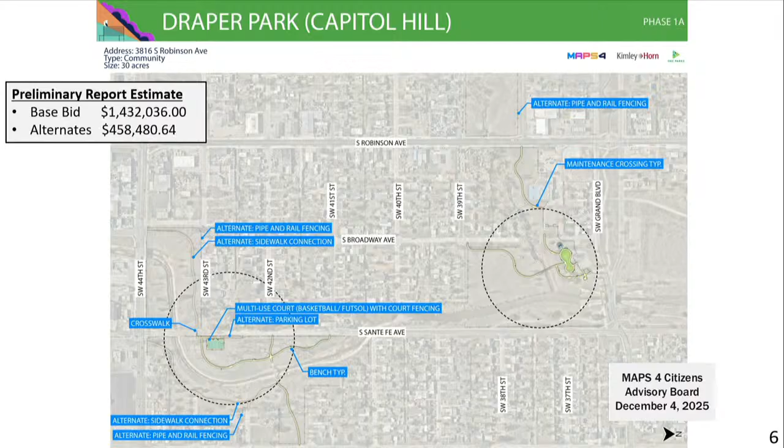We'll quickly go through the highlights of the 20 different park improvements. Capitol Hill, or Draper Park, is a long linear park where we really focused on connecting neighborhoods on each side of the park, so a lot of the improvements are those connections, plus a maintenance crossing through the park. Here's an enlargement of one end that includes a multi-purpose futsal and basketball court, and connection to the existing bridge to better connect those neighborhoods. The other end adds a playground, a pedestrian bridge going across, and a shade structure, with new sidewalk, playground, and a multi-use court.

H.C. Schilling is a park next to Wheeler Middle School. They've already done a futsal basketball court there at the school that's adjacent and can be accessed by the public, so we're recommending adding a playground and splash pad combination. A lot of these focuses are bringing splash pads and playgrounds together, since some of them have been separated out.

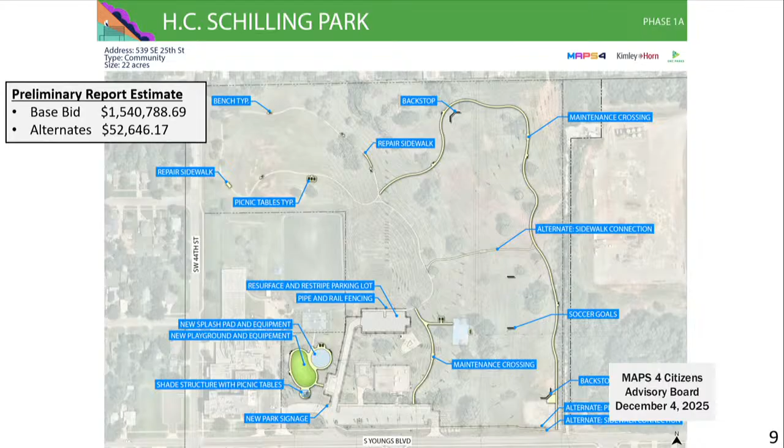So as we replace them, we bring them together into one space. We also are upgrading park signage. There's an enhanced trail loop on this one as well. They already had some trails, but we're continuing that loop around.

May Park, small, basically empty park currently, showing improvements of a playground, a new multi-use court as well. And as I mentioned, the park signage is something we really want to get into all the parks as we do this. The Parks Department has a new standard, so we want to highlight that, and hopefully that'll show the new look with all these park improvements.

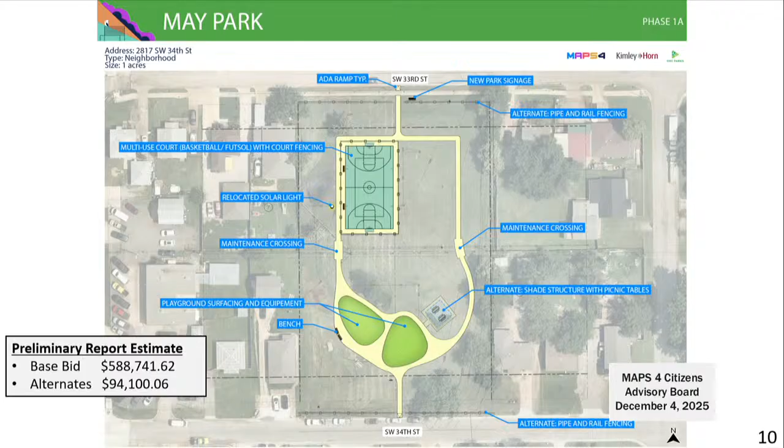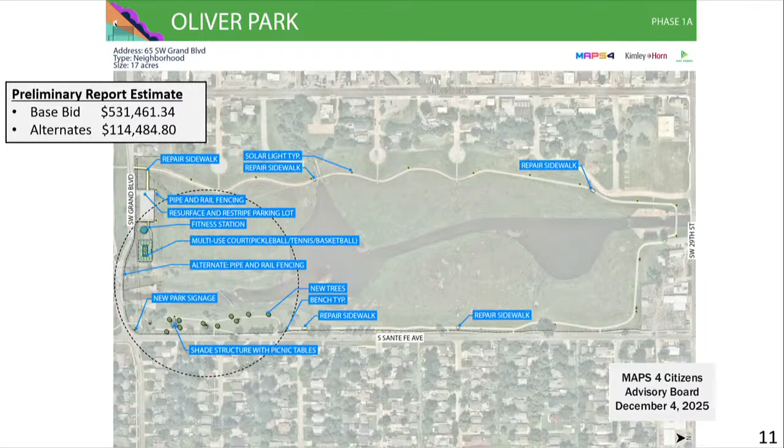Oliver Park. It looks like a large park, but it's mainly a regional detention basin, so a lot of the improvements are on the outside. We looked at the south end to improve the parking lot, multi-use court, some new park signage, and then lighting was a big piece along the loop of this trail. We didn't have a playground on this one because Draper Park is right next door and it has the playground. So we looked at improvements across the system to make sure we weren't duplicating.

And here's the end with the multi-use court, and we're also including a fitness station on this one because of that walking trail that goes around the park.

Shallowbrook Park is a larger neighborhood park that's getting a new playground. We also looked at goals and backstop locations, and you can see there's some dashed lines out there that show where the practice fields could be. So we wanted to make sure our improvements weren't taking space for those practice spaces. We looked at that and really worked closely with parks. Also, this has an alternate of a no-mow area. It's a large park where they just mow it right now, and we're trying to reduce some maintenance. So if we can get enough funds, we can do the no-mow area.

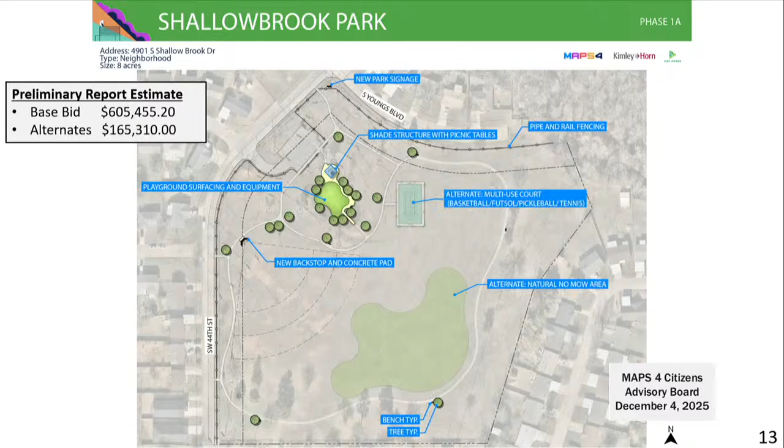Youngs Park includes replacing a playground and splash pad. It's actually a neighborhood park, and the recommendation isn't to have splash pads in neighborhood parks per the Oklahoma City standards, but it already had one. So we're replacing it, but it'll be a small version of a splash pad versus some of the larger community parks that'll get a larger splash pad.

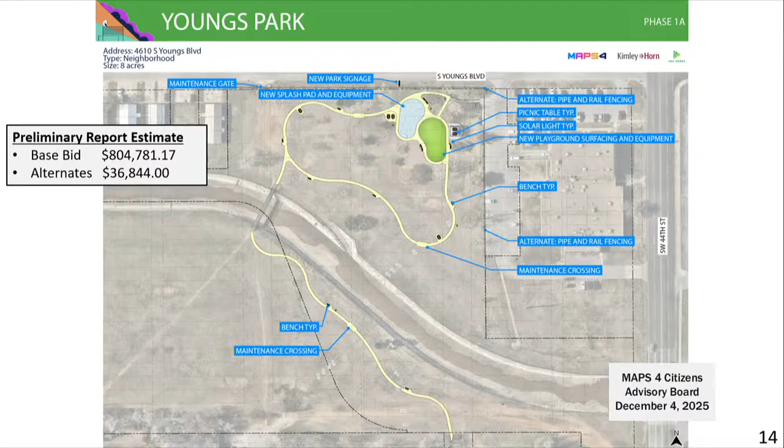And then the last one in 1A is Zurline, which is a long linear park. This is just one section of it, but it does include playground, multi-use court, and a pedestrian bridge. Currently there's a utility bridge with a pipe that people have used to go across, so this will definitely enhance that connection with the new pedestrian bridge across the creek.

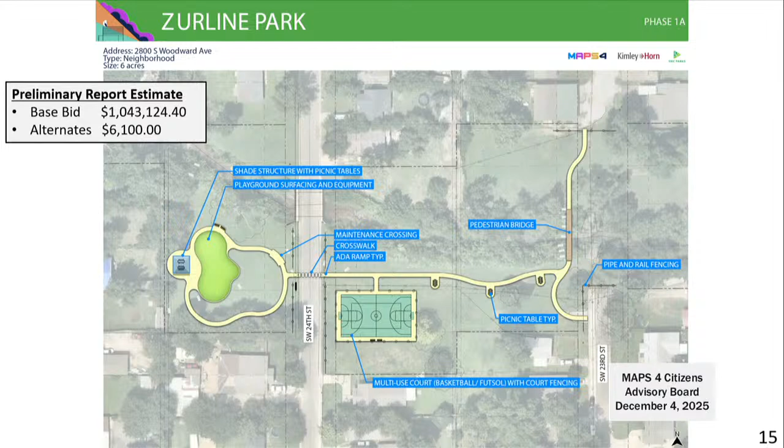And then 1B, I should have mentioned earlier, on 1A we try to geographically locate these parks so they're together for contractors to work in a more geographic region. So it was the parks with the most need, geographically located. 1B is a little more spread out, mainly because of the bond projects. So Macklanburg is on the north end of town, that's because it has bond money. So that's why you'll see that one a little outside the geographic area. But for the most part, the core parks are all consolidated together.

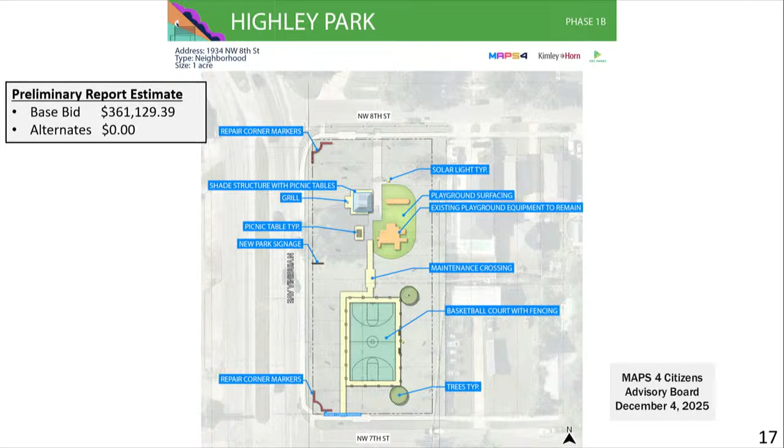So 1B has a budget of nearly 8.9 million, and that, like I said, does include the bond money. Highley Park in 1B is a small neighborhood park, currently has a playground, doing some surfacing upgrades, and then also a basketball court, and upgrading some historical markers on the ends that needed some repair as well.

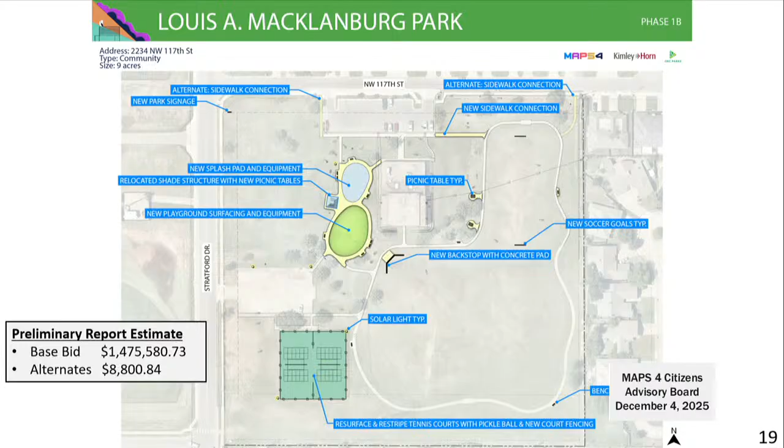Macklanburg is an active community center within the park, so really looking at how we can activate it together. So this one did have a playground, a splash pad on each side of the community center, bringing those together to create a larger play space. It also includes a focus on inclusive play, so the budget's a little bigger on the playground to really provide an enhanced inclusive play opportunity there. All of the playgrounds will have inclusive play, but this one's a little more enhanced. It'll also include striping and resurfacing of the existing tennis courts there, so there's 2 tennis courts at the park already.

Mark Twain, small neighborhood park, already has a playground that's in good condition and has some surfacing already in place. So adding some new surfacing and then a new shelter. Minimal improvements, but it already has most of the elements that it needs.

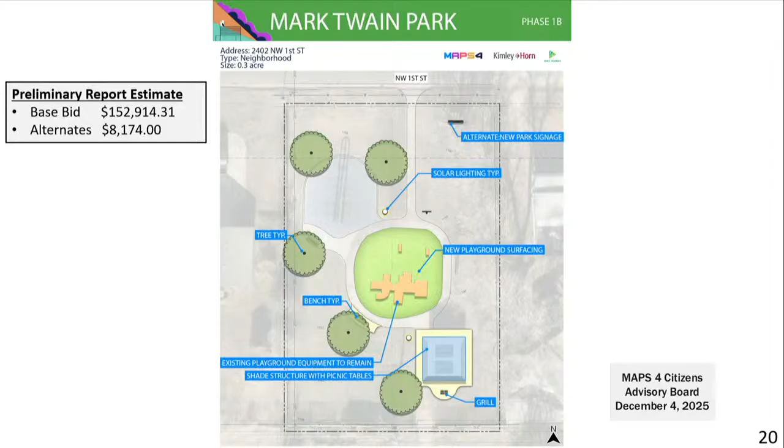McNabb Park is a long linear ribbon, really pretty area. It has some drainage that goes through it, so we're working through that. We also wanted to utilize smaller play areas because of its shape, instead of one large area, using 2 or 3 smaller spaces for some smaller kid play. Also looking at some protective decorative fence to keep kids from going out to the street on 33rd Street.

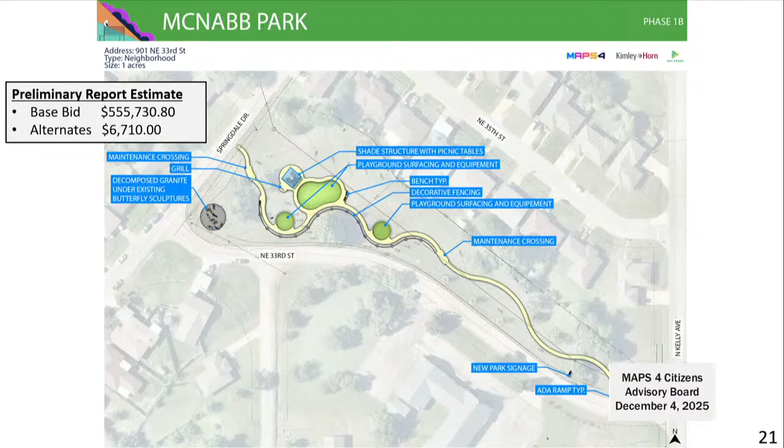And we're getting close. There's a lot of them.

Riley Leroy Pitts Park, again another community center park, active. We actually held one of our community outreach events there. It needs an upgrade to the playground. It didn't really have any walking loops, so we're looking at a walking loop, some backstop and soccer goal areas. It's an active park for practice, and we're doing some parking lot improvements on it.

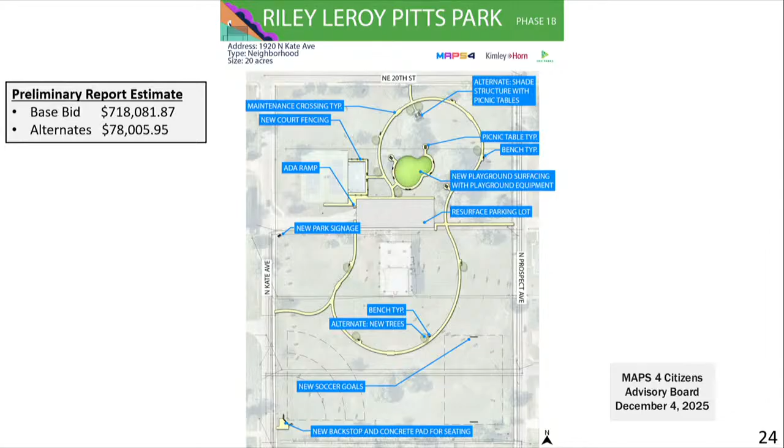Taylor Park, again kind of the same concept with the splash pad and playgrounds together, making those work better together. This one also had a basketball court within the parking lot, kind of an add-on makeshift basketball area out there, so we're removing that and creating a new basketball court, as it should be designed and built.

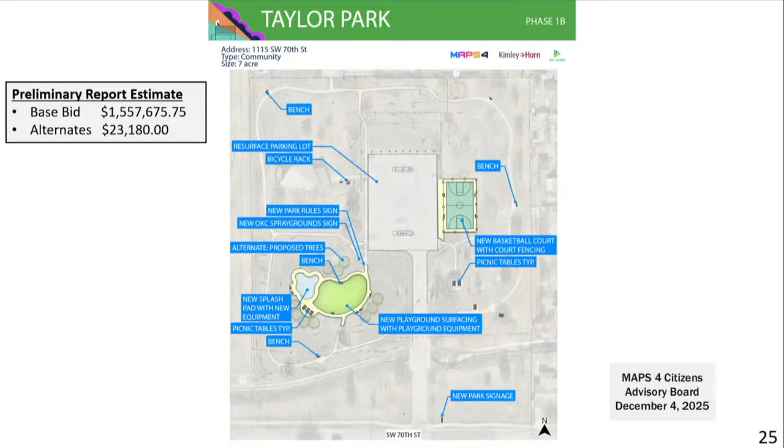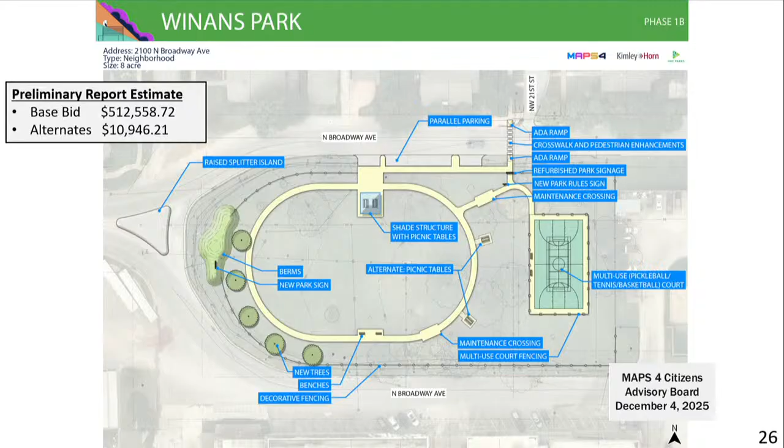And then Winans, so we've got two left. Winans is, if you're familiar with Broadway, where it splits off into one way each direction. It's an interesting park where it's located. There's some issues with people hitting the end of it. There's some arrows and signage that doesn't seem to help, but we're working on how we can improve that with some splitter island improvements on the end of the park, some new fencing. It's a historic park, so we're trying to bring back some of those elements that were there originally. We're working really closely with the Heritage Hills Neighborhood Association. We've met with them on how they envision it, and between them and parks, coming up with a concept they can further enhance. It also includes a crossing across Broadway to the neighborhood, so an enhanced crosswalk improvement there, and then a multi-use court to go along with it.

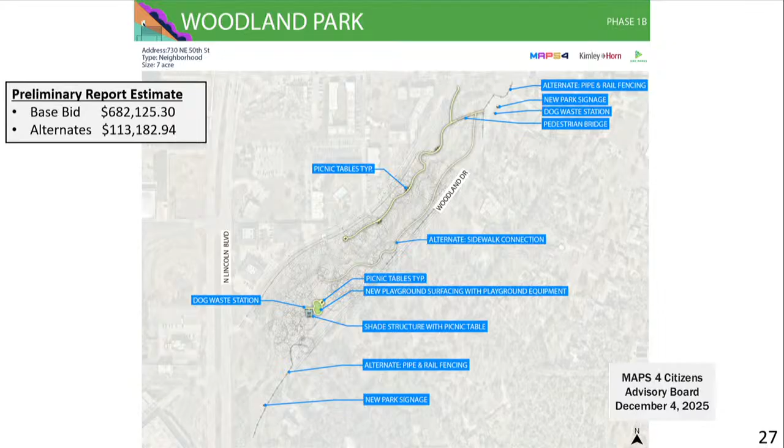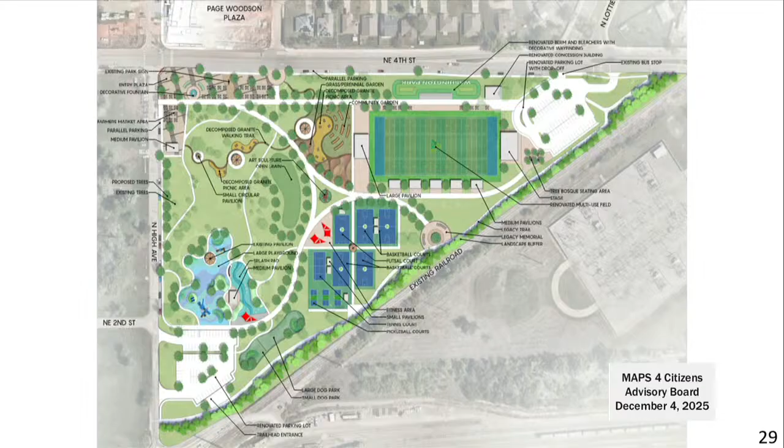We did have a stakeholder meeting a couple weeks ago to get some direction on what should be the priority, so we're working through that, and it seems to be a lean towards the playground improvements and splash pads, everything kind of on that west side. We'll continue to refine this and work through the design with them as we move into 60% plans, but it'll be based off of this master plan and go as far as we can with the budget.

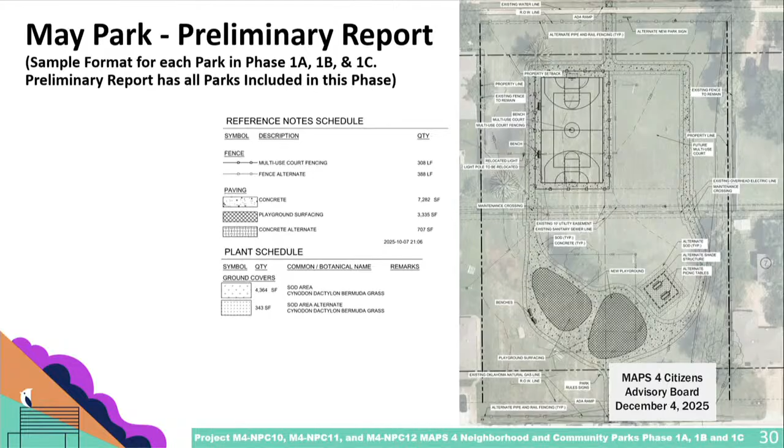And these are just a couple examples of the preliminary report plans, which are more construction document level plans. So this is just a cut of one of those.

And then our cost estimates that we built with all of these—you can see in the big report, each of the parks has this detailed cost estimate and alternates included.

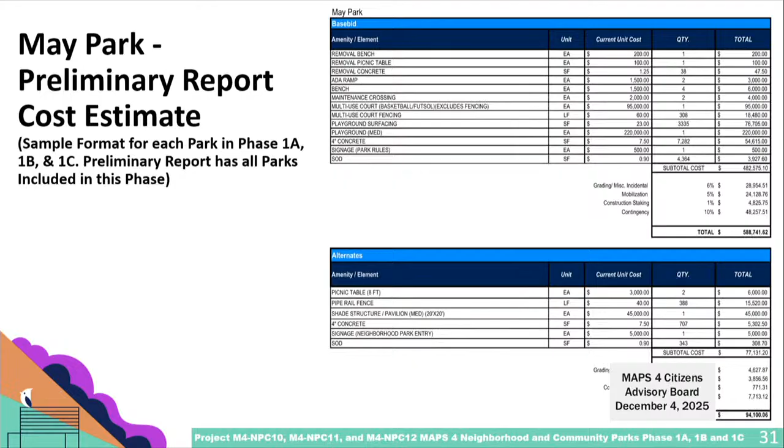As far as schedule, we're here for preliminary report approval. With approval of this, it'll go into 60% plans with the idea that we would be through with design mid next year and then starting construction in the middle of next year. Right now we're anticipating about a 180-day construction window for the 1A and 1B phases, and then about a year on Washington Park.

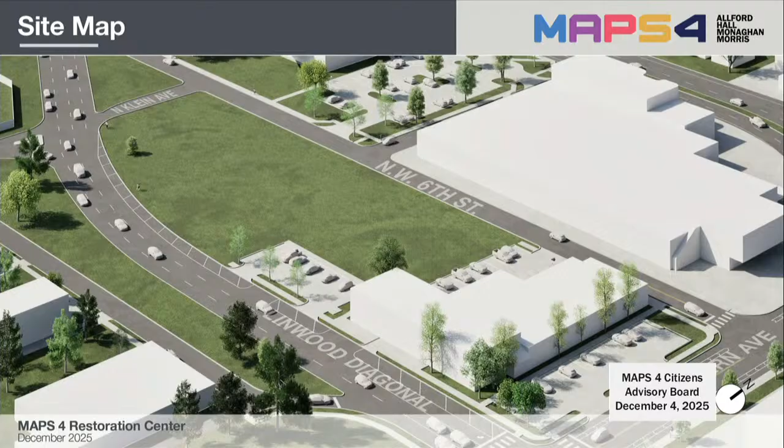We originally, back in May '24, were given a brief for the project estimated at about 51,000 square feet. We took that information and looked at a series of different test fits for the project to make sure the site was suitable to house that, and also the supportive housing, which is part of our contract but not part of this presentation.

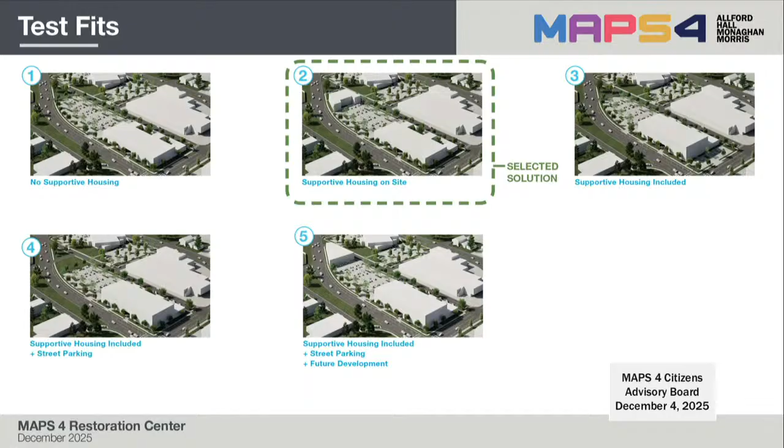That's following on later. As you can see here, option 2 was selected, which was basically to put the supportive housing to the west of the site, bookended with the restoration centre to the east, and in the middle contain the parking.

So this is a site plan showing the restoration centre to the east, supportive housing to the west, and in the middle we have the parking.

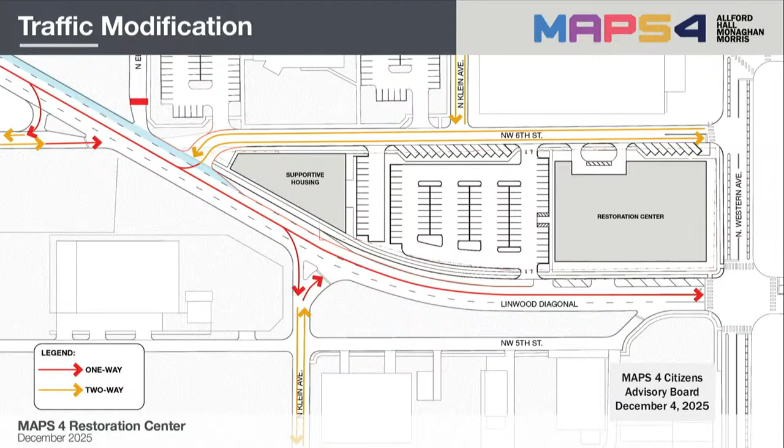To enable this to happen, currently Klein goes directly north and cuts off an awkward triangular portion of the site. We're proposing to close that part of the street, which requires reorganizing 6th Street into a two-way street all the way along, east to west. Currently it runs about three-quarters of the way as a two-way street, then moves into one-way at the end. To enable us to do this requires closing one lane of Linwood for a short portion of the site to the south, and then reorienting the traffic accordingly.

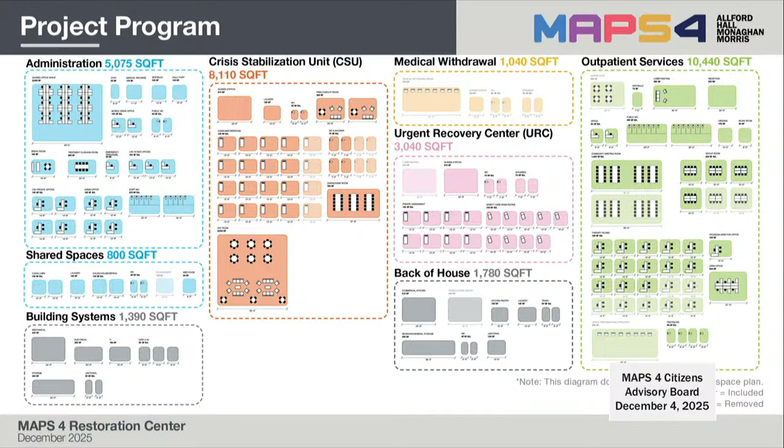As we start all projects, we work with the operators and produce a graphical brief going through each individual section and part of the project, talking about exactly how big it needs to be, how those areas relate to each other, and whether there's any economies of saving area where functions could double up and duplicate use. Through that process, we worked out we could actually reduce the total square footage of the building down to about 34,000 square feet, while still maintaining all the requirements for the building.

Working with the operators, we developed a few key strategies for the project. One was how do we be a good neighbour to the community and a building that is open and welcoming to everyone who passes by or uses it?

How do we connect to landscape and nature to really support recovery and healing? How do we create great collaboration spaces? There's lots of partners in this building, so how do we get these guys to come together and work together

in a collaborative way? How do we provide healing and support spaces for individuals and for groups? How do we create a safe and secure building for the occupants and for anyone who's visiting the facility, and create comfort and make it feel as uninstitutional as possible? So they were the key drivers that we were thinking about when we developed the design for the project.

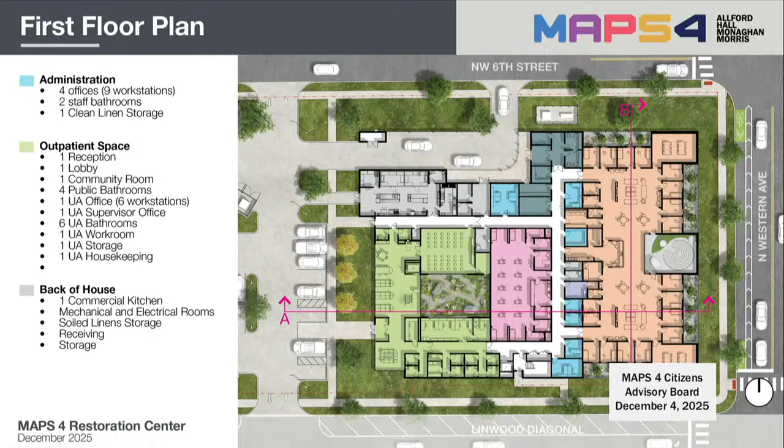Fundamentally, you don't really want windows directly to the outside in these buildings because family members and friends can come up and disturb the occupants during their therapy. So we didn't want high-level windows that feel a bit institutional.

So they have full height windows to their rooms, and then a courtyard space 8 foot deep with a planting zone, and then a mesh screen to separate between them and the street. From the outside, that mesh screen appears solid, but from the inside, with natural light behind it, you have an obscured view of the outside.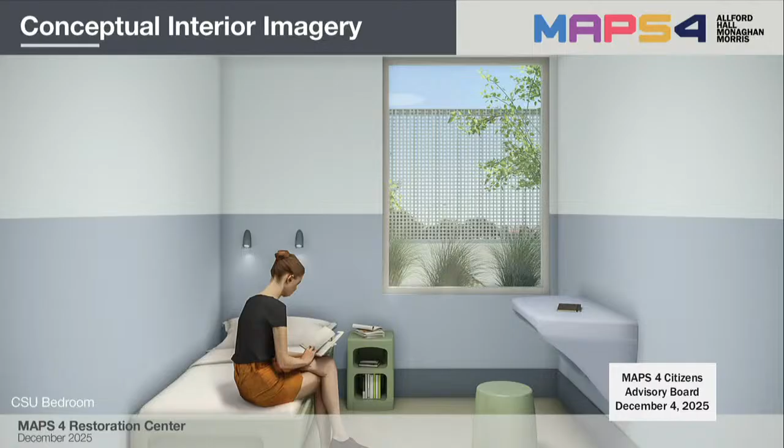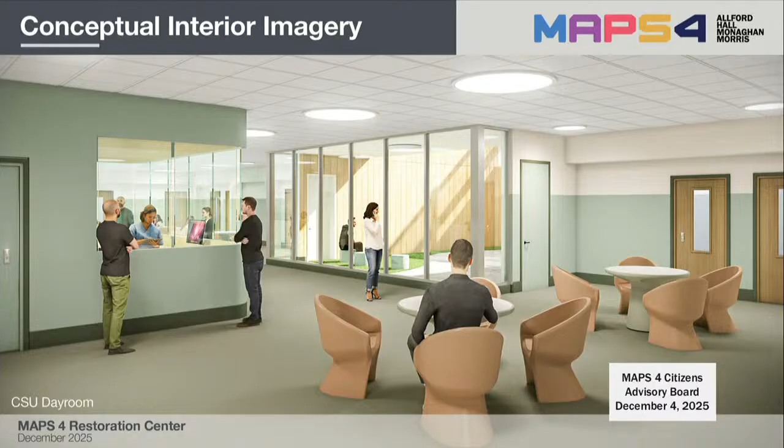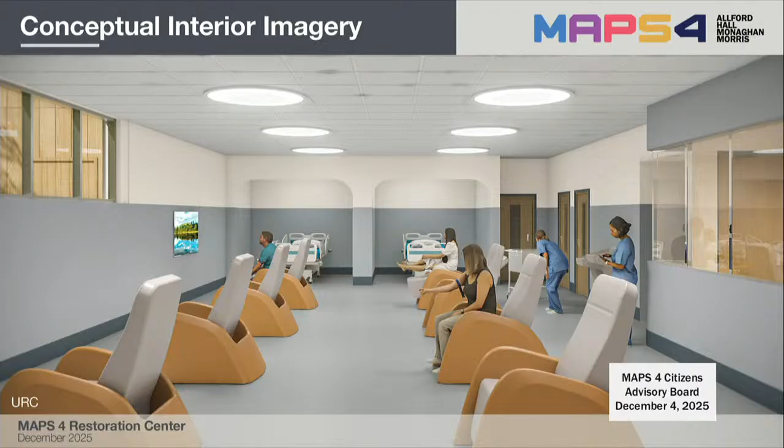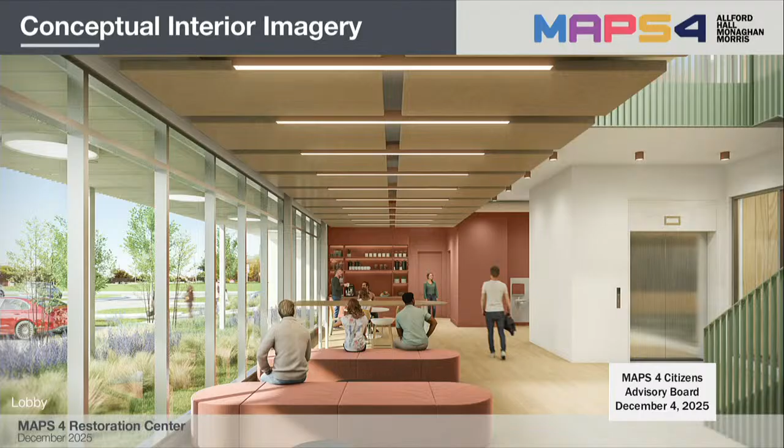This is the waiting area, just off the reception space, which also doubles up as an informal area for people to meet and grab a cup of coffee.

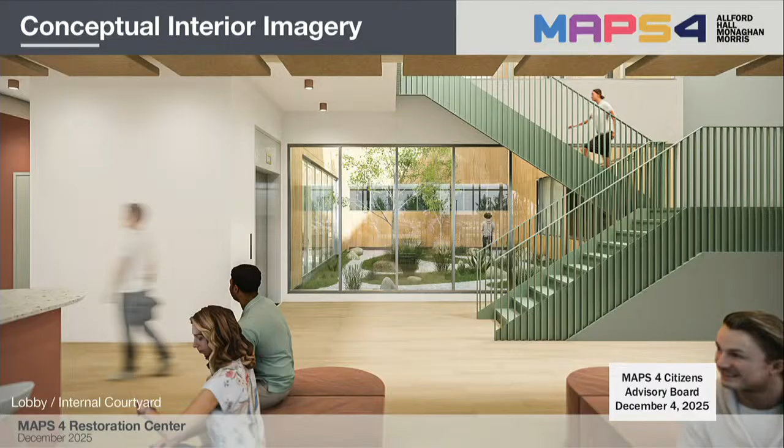And that's another view of that area looking back towards the internal courtyard space, bringing natural light deep into the plan and connecting people to the outside and to nature, with the staircase that takes you up to the remaining outpatient facilities.

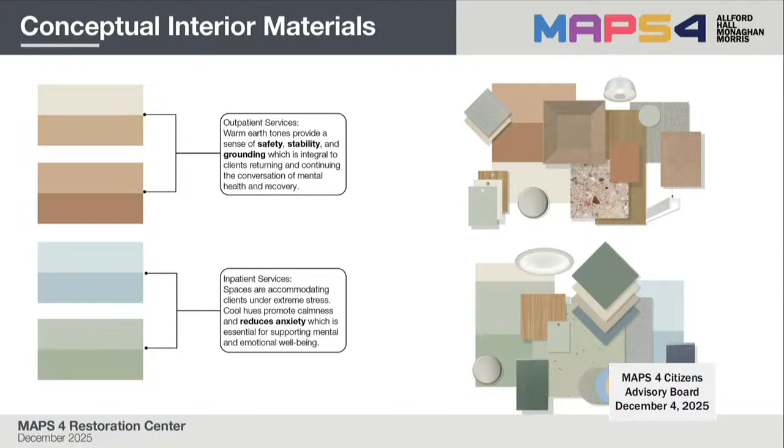We've given a lot of thought to the color palette. There are warm, earthy tones to the outpatients, which hopefully bring a sense of safety, stability, and grounding. For the inpatient crisis areas, there's bluey, greeny hues, which help reduce anxiety.

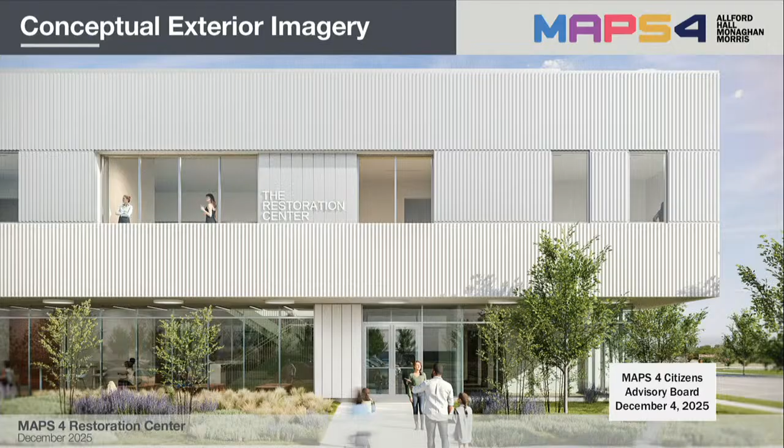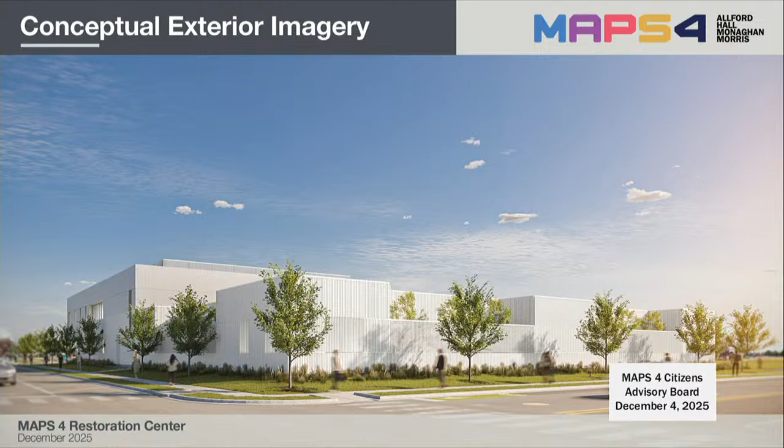Fundamentally, this is the area that doesn't really want any windows to the outside. So by bringing in these mesh screens and layering and planting, we've created quite a dynamic facade.

And that's another view of the corner on Linwood. You can see very clearly we're using glass where we can at the entrance and reception area, which really opens that space up and clearly defines where the entrance is.

Again, landscape, as I've mentioned a number of times, is key to this project. So I've been working with a landscape architect to make sure there's a relatively low maintenance landscaping scheme that is native where possible and can bring visual interest throughout the year.

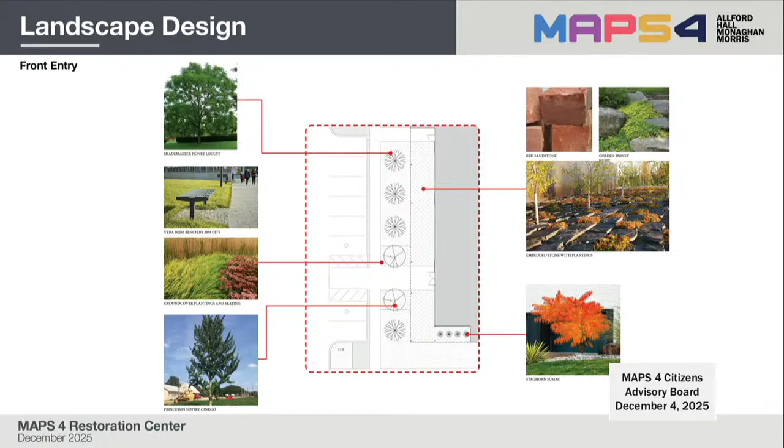So that's looking in a bit more detail at the entrance area with the planting, denoting some key trees to again highlight where the entrance is.

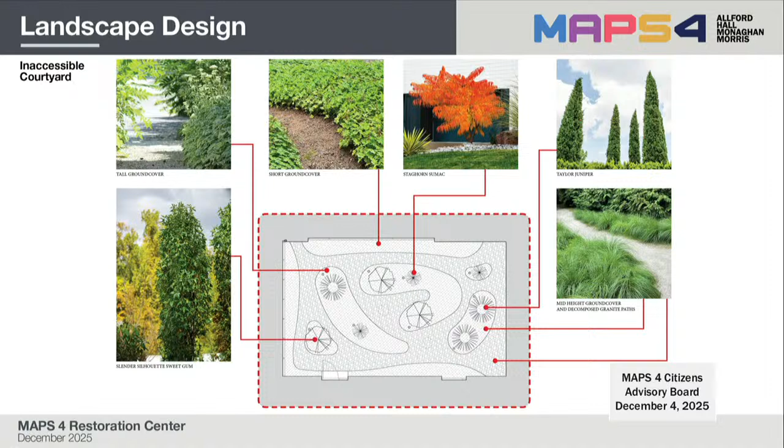This is the courtyard that gives that visual interest from reception with some key trees that will be really quite dramatic in that space. And this is the courtyard in the CSU that people can walk and enter.

We deliberately avoided any planting in this area or anything that can be picked up or damaged. So we've introduced a labyrinth meditation pathway onto the floor, into the concrete.

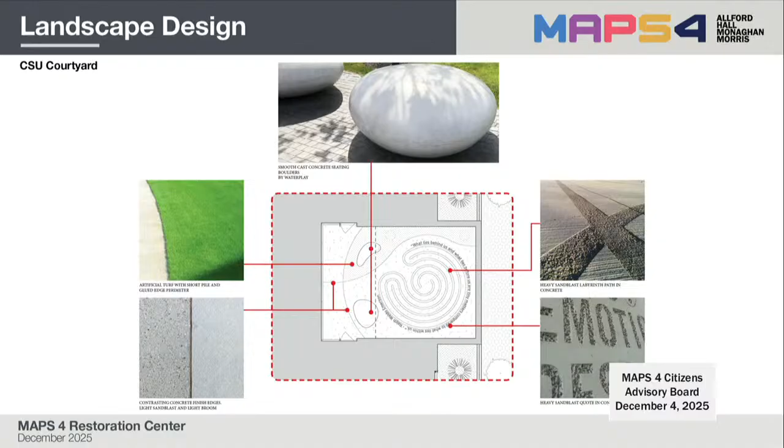There's some artificial turf there and some seating elements in concrete that can't be moved or used as a weapon.

Looking at the cost estimate, we've worked very hard to make sure this project comes in on budget. With the land acquisition savings, as the land was donated to us, including construction and FF&E, the total project budget was just over 18.5 million. Our estimate has come in at 18.5 million, just under, so we're very pleased to be bang on budget.

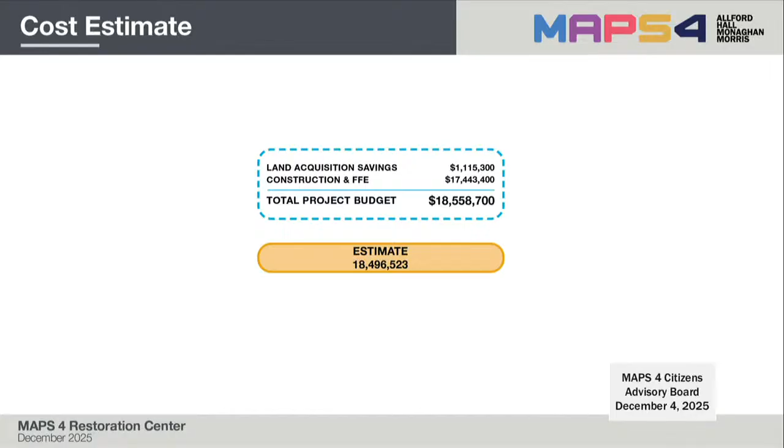Looking at the schedule, we've been working on this since May 2024. We've submitted our preliminary report, which is currently under review, and we're hoping to get approval to move into Task 2 in January. Thank you very much. Any questions?

Okay, do we have any questions for Dan on the presentation? No, seeing none. Thank you, Dan. Okay, do we have a motion and a second?

And that motion passes as well.

Moving on to item E, recommend authorizing negotiation of an operating agreement with Oklahoma City Housing Authority for the MAPS 4 Supportive Housing Operating Partner. An RFP was put out, and we received three responses, though only two were appropriate. We did interviews - a panel of city staff and two members from this board - and they are recommending that we negotiate with Oklahoma City Housing Authority for operation of the housing associated with the facility that Dan just showed you.

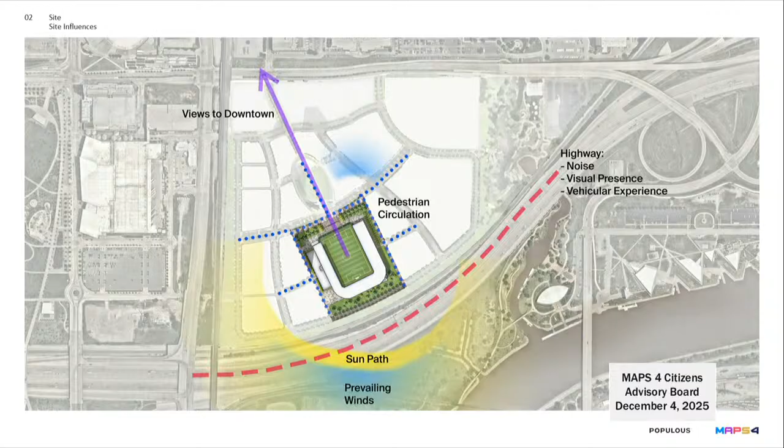So some key factors we took into account when we started shaping this stadium and seeing what it wanted to look like are on the screen here. Obviously, I-40 is a big factor. We've got the noise and the traffic, but it also gives us a ton of opportunity with exposure - not pedestrian level exposure, but there's hundreds of thousands of cars going across that every day. The sun and prevailing winds guided our canopy design, and we have the great view towards downtown on the north that we wanted to capitalize on. So that's how I got that U-shaped stadium we're looking at today.

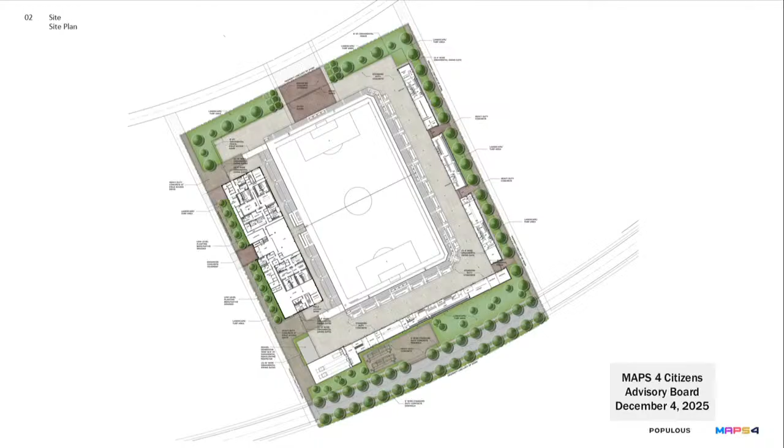As we zoom in closer at the ground floor level, you can see we've got three buildings that create that U. The building on the west is our main building that houses our lockers, our club spaces, our premium press, all the stuff that can't look into the sun, up on the second level on the west side building. The south and east side buildings are what we call concourse buildings - they support restrooms, concessions, and all those support spaces that the fans will engage with in the seating bowl. On the north side there's the main entry gate, opening out towards the downtown area. We'll look at the west side and stuff a little closer in the plans here.

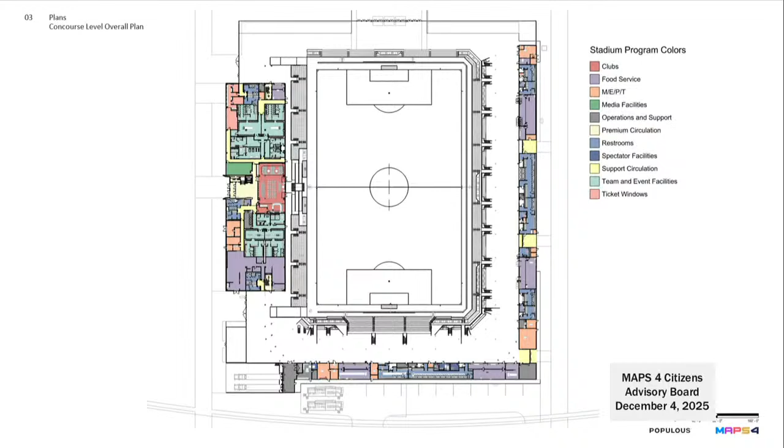As we dig into the plans, this is the concourse level. Important thing to note on this level is the field is actually almost 6 feet below this level, so as you walk into the stadium, the field will be recessed. It'll give a really intimate feel with a lower bowl going all the way around the seat, all the way around the field. The field is sized to support soccer, which works well because that means it can house everything else too - that's the biggest pitch size, so football will fit within that soccer field, and any other sports can fit within that. On the left side is our main west building with our lockers and club spaces, and then those two concourse buildings on the east and the south - we'll zoom in and look at that closer here.

So this is our west building. I'll work left to right here to talk through it. It's got our ticketing office right there on the lower left corner, and then the two big areas in teal there are our locker spaces and our player facilities.

An important thing to note here is equal men's and women's lockers provided, hitting on that flexibility theme. We've designed an operable partition between those two spaces, so when it's not men's and women's soccer or other sports, it can be opened up and sized for football. Soccer teams need about 24 lockers, but we put 30 in each locker space so that when opened up, it becomes 60 lockers for a football team.

Additionally, we've got 2 on each side when it's soccer, so if we have tournament play or back-to-back games, all 4 of those can be utilized at once and teams can rotate through that space. Right in the middle is our main club space.

You can see that opens up to the lobby. When you walk into that side, you'll see straight into that club space - a really nice event space. The wall between the lobby and the club we're envisioning as operable glass so they could even open that up. We want to utilize this facility as much as possible, not just on game days, so the idea is that's a leasable, rentable space that can be used outside of game days - an awesome space to rent out for events. You're looking right onto the field from there, so it'd be a really nice space. They can either use just the club space or open it up and use the entire lobby and club space as one.

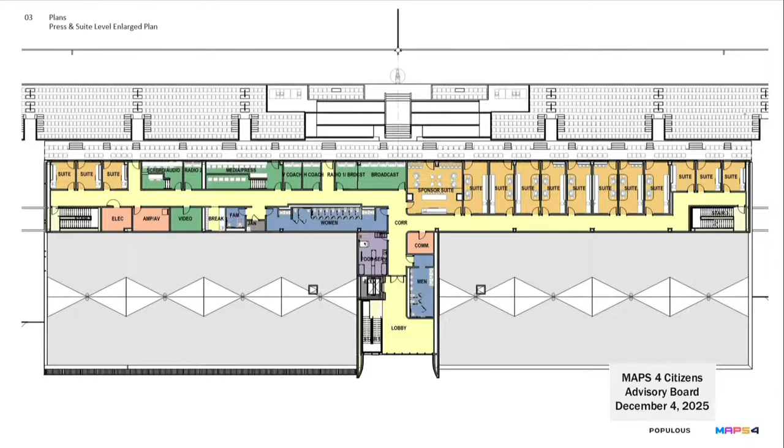As we go up a level, this is our suite and press level, right above that west building we just looked at. Zooming in, this is essentially comprised of suites and media, broadcast, coaching, all the technical rooms that need to look straight onto the field. The green spaces are broadcast, press, and coaching spaces. The orange spaces are suites - we've got about 3 different sizes of suites for different levels of experience.

Before we go on, I just want to make a comment - we've designed the seating bowl to be as adaptable as possible. We have loge positions, which are like the 4-top seats, so we're really about stratifying the offering. So you have the supporter section, then GA, then loge boxes, club seats, and then suites.

So you have lots of different offerings all throughout the facility. And then there's this ability to adapt the sideline, so we can actually put those loge boxes anywhere down that eastern sideline that we want to. It's built to do that.

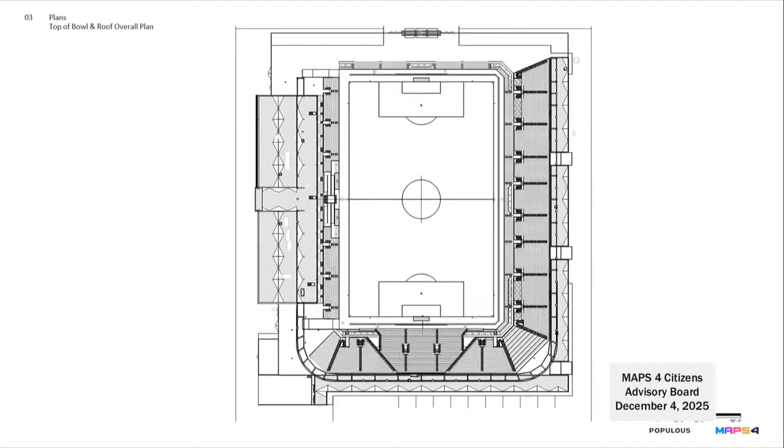We'll evolve and develop that as we move through the design process with the feedback we get from Court and Echo and their team on the ticketing. In addition to reserving spots, they're saying where they want to sit, and that will tell us how much seating we need in different areas. So we're trying to design this so we can really easily change that throughout the course of not just the design, but even in the future if they need to adapt it.

Not only does it cover you from weather and wind and everything else, but it also increases the atmosphere in there — the sound bounces off that roof. It just gets a much more vibrant soccer atmosphere when you're inside the stadium, and it gives it kind of the iconic look from the exterior that we all were hoping for.

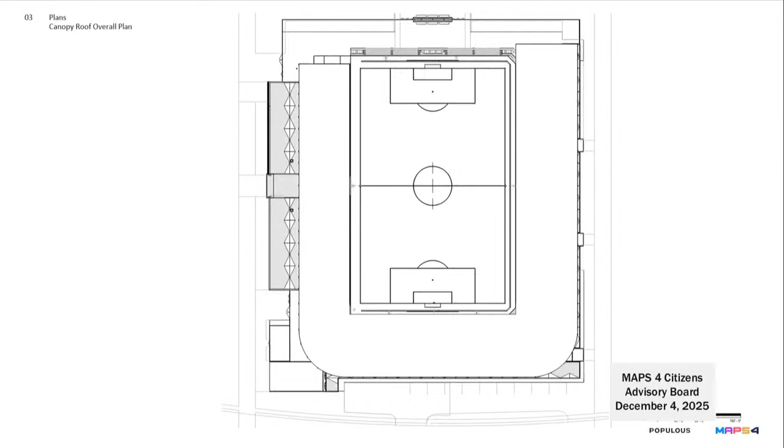All right, as we jump into design, I'm going to hand it over to Phil to talk a little bit about that. Yeah, thanks Travis. So we really covered the fundamentals of the interior. Now we're going to flip over and talk about how we think about the exterior expression and how this facility sits within the city. We really wanted this to be rooted in Oklahoma and reflect a sense of place.

One of the things we were really inspired by was this idea of rolling fields of wheat. That's really a good metaphor for this facility, because you have these individual stalks that come together, just as individual stalks are in this field, so are patrons within a crowd or citizens within the community. So we thought that was a really great metaphor to start with.

In addition to that is the idea of the beautiful skies, these sunsets and sunrises, and how they come down and meet the horizon. I think that's really the key, where these two elements meet together, and it's very powerful — this idea of the rolling fields and this dynamic, changeable sky, this idea of adaptability, but coming together into this limitless horizon that's expansive across both, where these pieces come together. It's really about, not just within the community, but this idea of what's beyond the next hill, what is the future for Oklahoma City. We like those two aspects as inspirations for this facility.

So that's kind of a tall order, right? How do we execute on those designs? As we looked around, this idea of rhythm and repetition we saw very common throughout other facilities. But what happens in those is they're really sort of concave, really finite to themselves — the lines are sort of internal, almost like a fortress. We didn't like that. We liked the idea of repetition that's very wheat-like, bringing things together to create a form — many small things creating a bigger form.

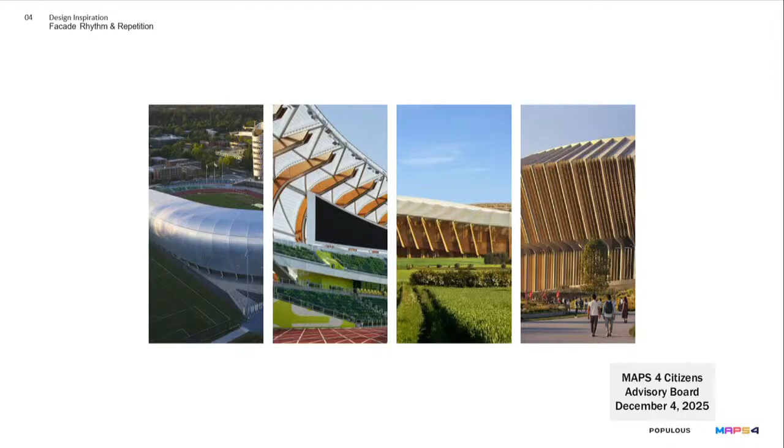By doing that, we can change those with different lights or even potentially projections. You could advertise what's happening in that facility, and it could be different all the time, so it's not just a static sign representing the teams, men or female for the soccer component, but also other activities happening within the facility itself.

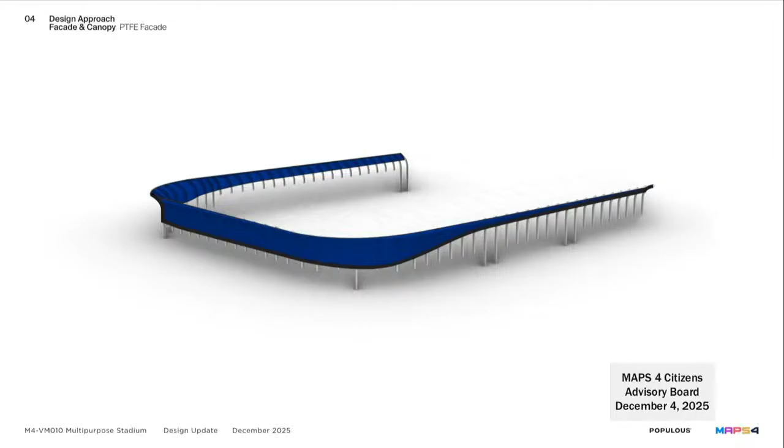So how we started is this idea of stalks of wheat, but instead of wrapping in and closing in the stadium, we really wanted it to bow outward, almost like bowing in deference to the community it serves. On top of that, we then begin to wrap this scrim element that follows that bowing outwards.

That really starts to gain vertical scale here on the south side, which is on the left. That fronts on I-40 and has that bigger civic scale where you have cars driving by at 60 miles an hour. So how do you digest the stadium in that quick aspect?

That's where we can really have that idea of advertisement, not advertisement, but really just communicating what's inside the building, inside to out.

And then the canopy itself, this idea of enclosure, right, this idea of sky, but it really protects and amplifies the fans' impact on the match, keeping that inside the stadium. But it's really about where these two pieces come together.

So you have that bowing of the wheat and the component of the sky coming together into this infinite point that continues to expand out to the horizon. It's really about communicating that all the way out to the horizon. It's about what's outside bringing in rather than inside out.

And we really like that idea. It really becomes something that's absolutely unique to Oklahoma City. There's no other stadium that has this outward bowing facing piece. All the motifs of design language become enclosure and finite, within an object, rather than out to the horizon. So we're really happy about the way that comes together.

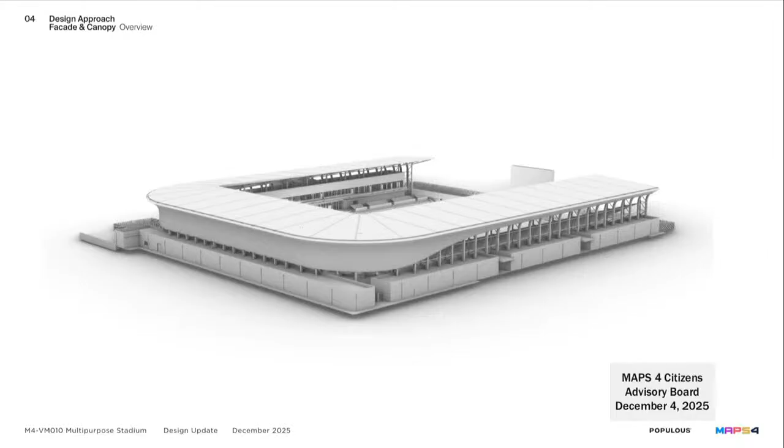So if we bring together the function, nuts and bolts, and that outward expression, you get the full building itself. Here we are looking south, and you get to see the edges of the stadium expanding outwards.

You get to see the civic scale really a lot taller, with higher speeds, bookmarking its place on I-40 here on the south, but also opening up and being much more pedestrian friendly on the north side, where we break down that scale. So it's really an adaptable facility within itself.

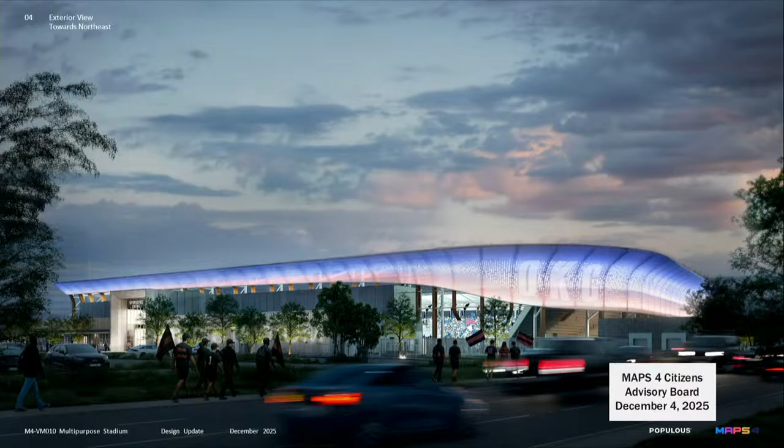And then again here on the south side, where we're looking at the skin as it's lit up and dynamic, changing to the events that are happening inside the stadium itself.

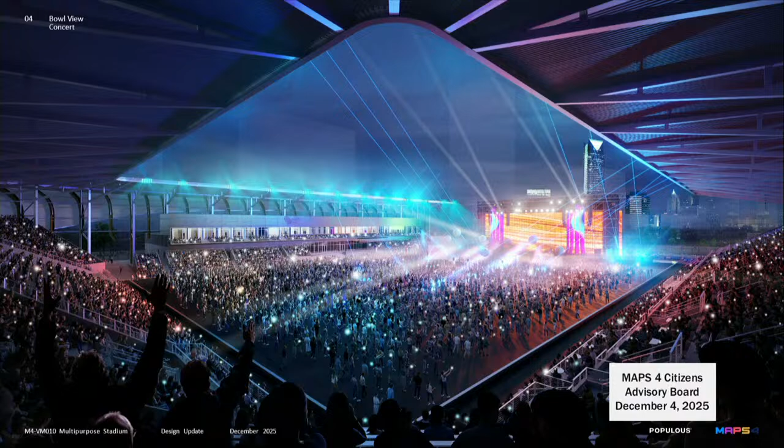To your left, at the end, right behind the goal, you have your supporter section standing, creating that impact on the match, rattling that near goalie if they're on the other team, or supporting it if they're on their team. And then the multipurpose aspect, where you have the ability to change it over into concerts or other facilities or graduations or any other events that can support the community.

And then we'll move on from the dynamics to the numbers, to budget. Our cost estimate, total construction cost, is coming in at $108.8 million. So how we work the budget, we have the MAPS and TIF and bond funding, which is currently coming in at $94.1 million.

Again, this is just a first look at the stadium, so we're going to continue to work the project cost down. And then we're looking into other donations to keep that cohesive picture, the inspiration for the project, intact. So we're finding ways to meet those things in the middle through private donations, additional funding, and sponsorships.

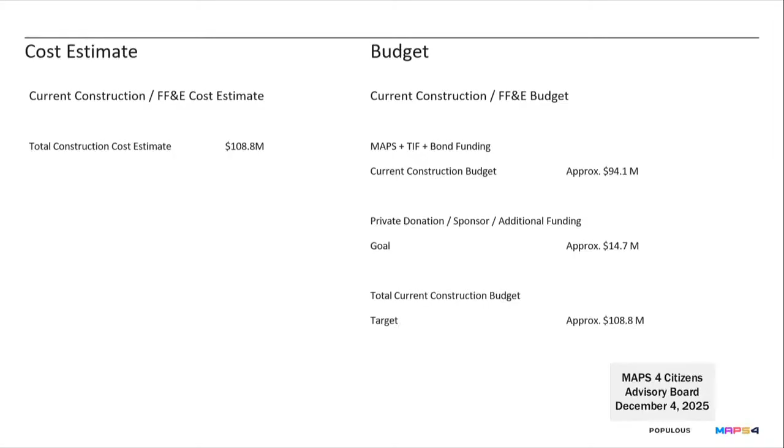And then last but not least, just a quick schedule to give you a bookmark of what's happening as we go forward.

So today, December 2025, we're providing the design update. January 2026, we'll be back here doing the preliminary report. It'll be a little bit more comprehensive version of what you're seeing today.

Then the construction document phase starts. We're going to be drawing the building from January until May 26. Throughout that time, the next presentation is the CMAR one, where we'll talk about how we can start to overlap design and construction. That's going to help our schedule.

So construction is going to start sometime in spring 2026, and about just over a year and a half, complete in December 2027, with an opening in the spring of 2028. That gives the team time to understand the building, have some opening events, and then be ready for that big opener.

And with that, we'll take some questions.

Questions for Travis and Phil? Okay, seeing none, thank you both. Thank you so much. I guess you're probably not moving very far, are you?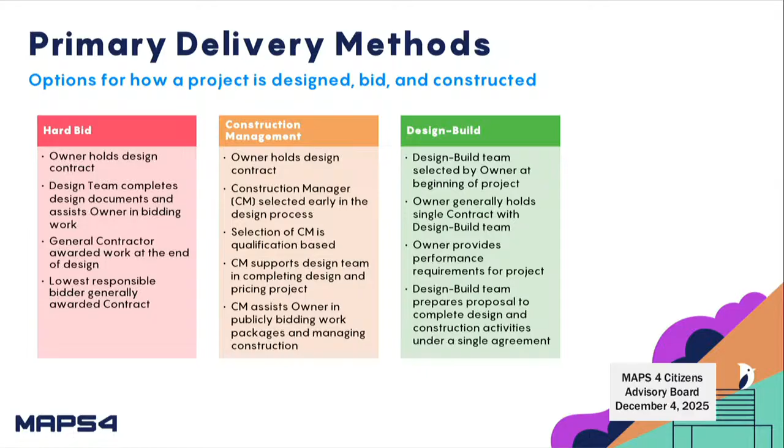There's a third delivery method called design build. I'm not going to go into it in a lot of detail - it's only here for the sake of completeness. It's a delivery method allowed by Oklahoma State statute. Really, the only time design build is allowed for political subdivisions, which is what the City of Oklahoma City is according to state statute, is on water and wastewater projects. The MAPS 4 program obviously has none of those types of projects in it, so it's not one we will really get involved in with this program. So we're not going to spend much time on it.

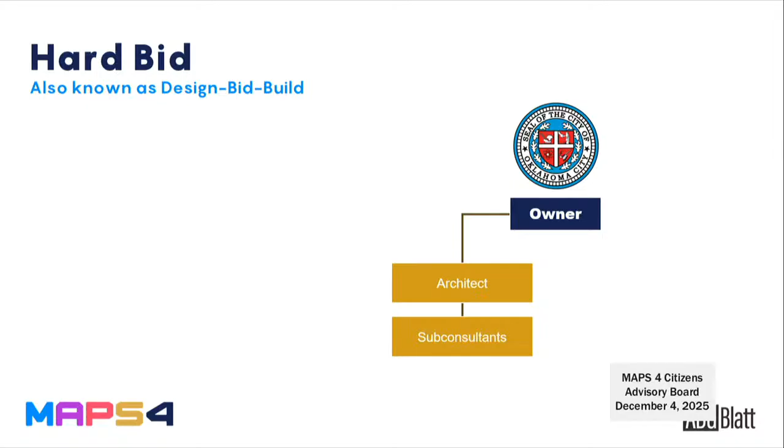This is just a quick graphic of what a hard bid delivery method looks like. You can see the owner there, the City of Oklahoma City. They hold a prime agreement with the architect. The architect has several subconsultants that work for them under their contract. Then on the other side, on the construction arm of the team, as I mentioned, the city publicly bids and awards a contract to the lowest responsible bidder. That general contractor has subcontracts to help support the general contractor and complete components of the work.

One thing that will help drive home the difference: on a hard bid scenario, the City of Oklahoma City as the owner doesn't really have a lot of what we call line of sight down to the trade level. There's a bid form, the general contractor fills out the bid form, and a lot of times it's a single lump sum bid, so they'll fill in a number to complete the project. When the city receives that bid, they really don't know how that bid was developed - all they have is the number to go off of.

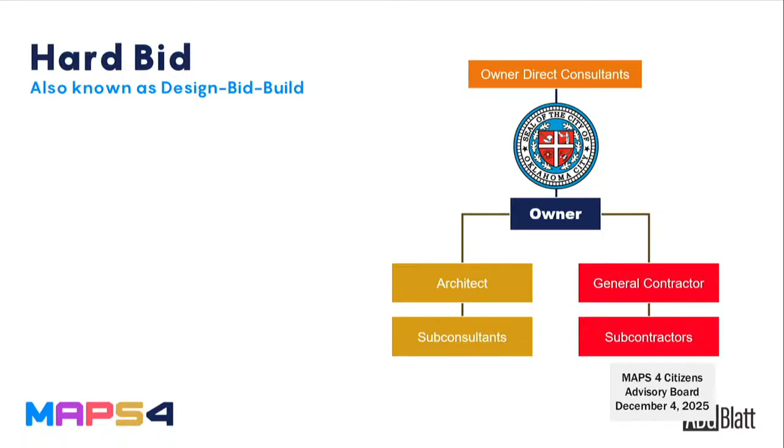That's very different from what it will look like using construction management. The City of Oklahoma City will have a lot more line of sight into how the bids came in for various components of the project. The city frequently has other direct consultants - construction testing, sometimes environmental, all types of other consultants that the city uses to support the projects - and that's actually consistent between the delivery methods.

For a hard bid delivery method, and really any delivery method we select, it's important to understand that the Department of Public Works at the City of Oklahoma City really administers the construction process. They're heavily involved in the selection process for design teams, the bidding process - all of the things necessary for the city to select teams and award contracts. The Department of Public Works is intimately involved in that, and that will be the same on construction management, but I think that's important to note.

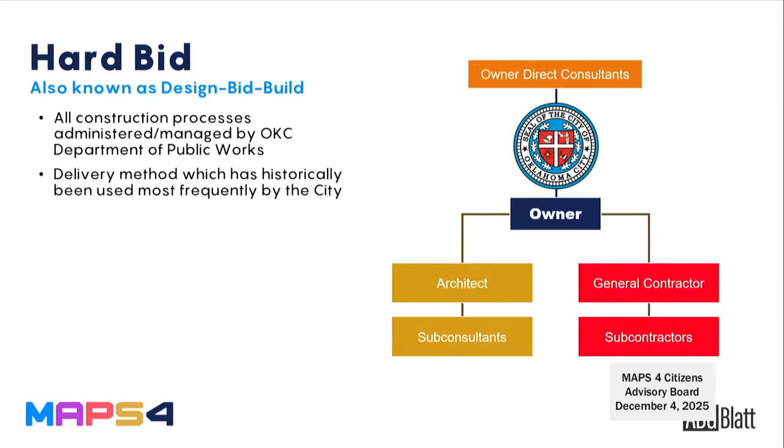As I said, hard bid is traditionally what we've used at the City of Oklahoma City. One thing to note is on a hard bid delivery method, the City of Oklahoma City must pre-qualify general contractors. In order for a general contractor to bid a construction project at the City of Oklahoma City, they've got to meet certain pre-qualification criteria that enables them to bid work. So even though the lowest responsible bidder is selected, there's a minimum bar that all bidders must meet in order to bid the work. This will be something a little different on the CM at risk work we're doing.

On most hard bid projects, we typically just have one bid event. As I mentioned, this kind of linear process - we finish design, we bid the work. There are some instances where we might have a couple of general contractors working.

So an early demolition package to prepare a site for construction would be an example of having a couple of different general contractors. But in general, typically on a hard bid project, we'll have one construction bid event. So that's something that will look a little different moving forward.

So what is construction management? One way to think about this is instead of hiring a general contractor to construct the work, we're really hiring what I would describe as a construction consultant to partner with us during the design process. They are a construction consultant, but they also have a role and responsibility in executing the work, and so they're just brought on much earlier.

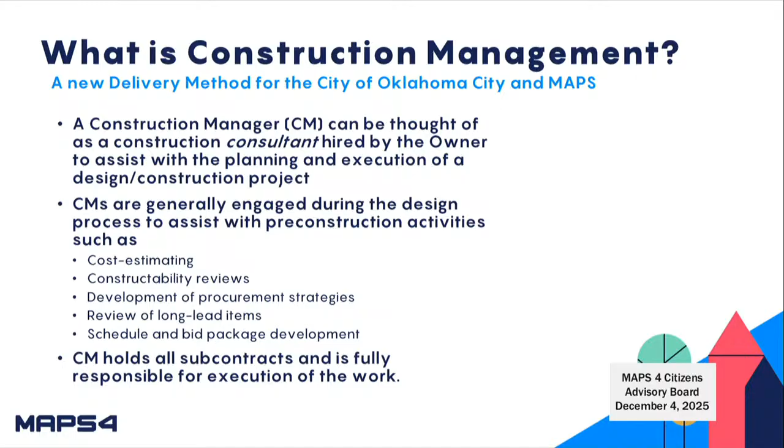Even though the construction manager is hired as a consultant, they still hold all the subcontracts. They're fully responsible for execution of the work. Nothing from that perspective changes under this new delivery method.

As I mentioned before, the construction manager at risk is a qualifications-based selection process, stipulated by Oklahoma Statute Title 61. So the City of Oklahoma City, just like they would select a design team based on qualifications, would do the same thing when selecting a construction manager. Construction managers would submit all their qualification statements, the city would go through those, and without trying to negotiate a fee for their work, they would select a construction management group.

Typically, the early contract negotiations are for something called pre-construction services, and so you'll see that from time to time. My understanding right now is that we are going to actually use construction management at risk on the multipurpose stadium, and so as those contracts come forward, you'll see that the initial contract includes pre-construction services, for all the things that I just described previously.

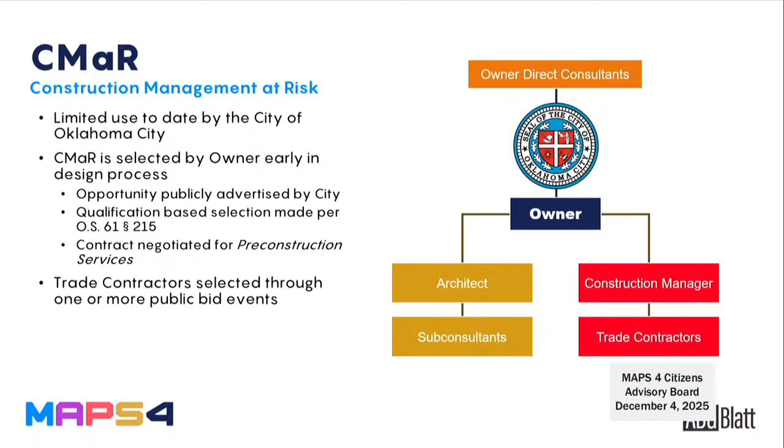I guess a way to think about it is all of the local companies that would have otherwise bid that work in a hard bid delivery method, they will still bid that work. They will basically respond to the construction manager's bids and submit bids for those trade packages that I described a minute ago. So it doesn't preclude open participation in the bidding activities, I guess is maybe another way to think about it.

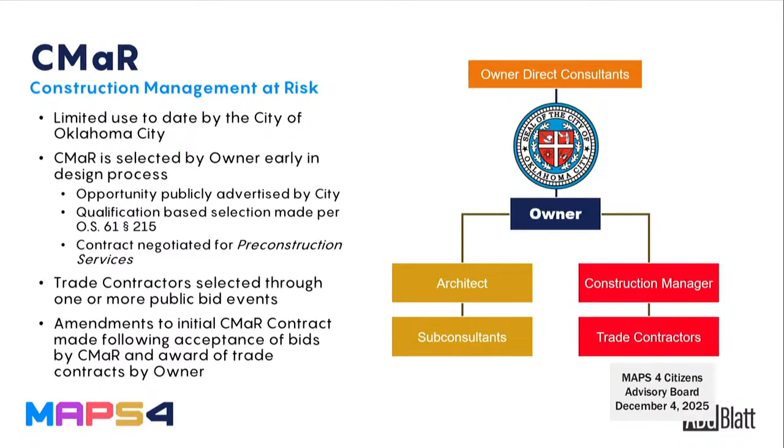One thing that is really much different on a construction management at risk project is instead of getting the single contract at the time of the completion of design, typically we will bring it forward for the board's consideration in pieces. So you'll see various amendments. You might have one project that's construction management at risk, but the construction contract might come to the board in 5 or 6 pieces or amendments. So you'll notice that as we move forward.

There's really not a single best delivery method. One of the things that we've talked a lot about over the past couple of years with the city of Oklahoma City is that there's really no single best delivery method that's the best one for every project. It should really be a project by project decision. So we've talked about that a lot.

The MAPS program as an example, we're constructing sidewalks, we have sidewalk projects. Well, there's no need for the city of Oklahoma City to hire a construction manager at risk to construct sidewalks. There's plenty of more than capable general contractors that can execute that work. The city of Oklahoma City is sophisticated enough that they can administer that work. There's no question about what the project might come in from a pricing perspective. It's not technically complex, and so it really is unnecessary in that example.

So item 3 here, just kind of reiterating that the way that we think about it is every project has got kind of a risk profile. So really selecting a delivery method is really based on the risk profile of the job and what makes the most sense for the owner.

I'm going to go through this pretty quick. This is just some other comparisons on how we kind of think about choosing between the delivery methods. Smaller projects frequently lend themselves to more of a hard bid type approach, whereas construction management at risk projects are typically on the higher end in terms of construction cost. Sometimes if there's a really aggressive schedule, you will need to consider construction management at risk. I think you'll see that here in just a minute.

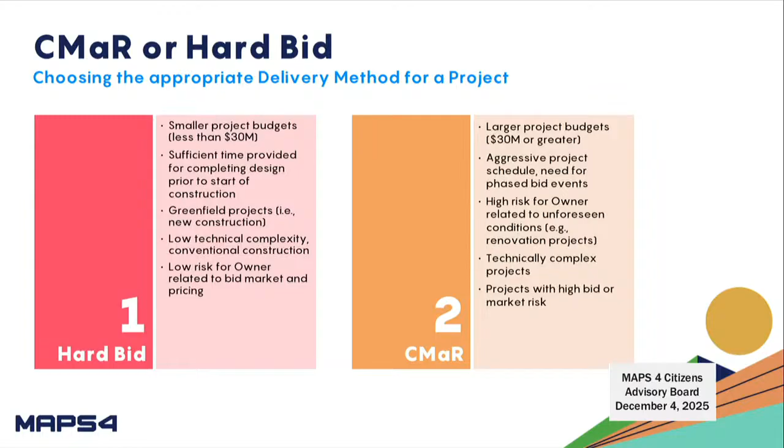And then we've already talked about complexity. One of the things that construction management at risk does is a lot of pricing work early on. One of the things I think the entire AEC industry throughout COVID, there was so much market volatility, and every day no one knew what they were getting on bid day. We believe that's part of the reason entities like the city of Oklahoma City and others are moving more to construction management at risk. It's not that it's less expensive or anything like that, it's just you get a better understanding of what projects are going to come in at on bid day, and that's a big benefit for most clients.

I'm going to go through this pretty quick. I know everyone's trying to get out of here. I think this is really important just to kind of understand these at a high level.

So this is the typical city of Oklahoma City hard bid process. As I mentioned, it's very linear. During the green bar that you see up there, that's a lot of the administration work we're doing early on in terms of selecting a design team. The orange bar there is all of the design activities. So the presentation from Populous today, as an example, was really that preliminary report milestone that's shown there. At some point, they'll finish plans, but this is what this looks like from start to finish. On a hard bid project, we would then bid the work at the end of design, award a construction contract, and then execute construction. So as you can see, it's this very linear start to finish process, very sequential.

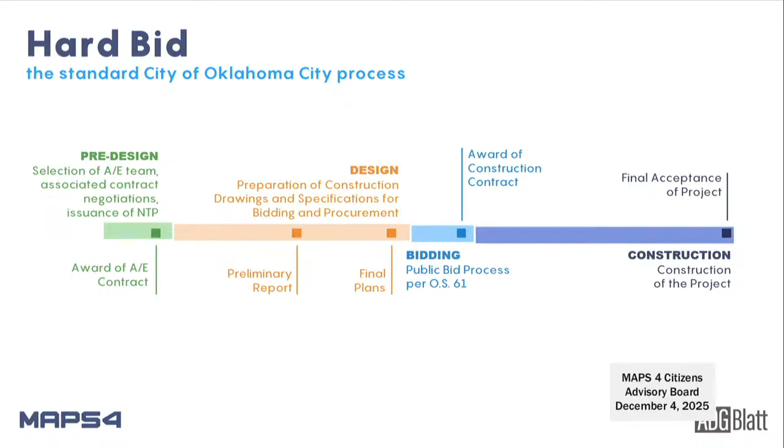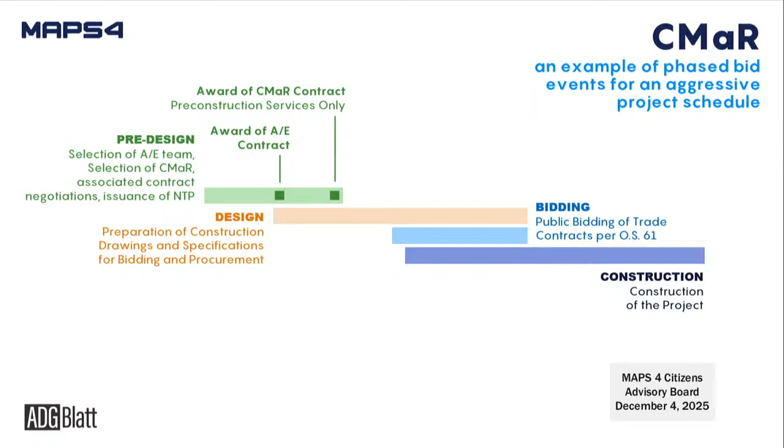So construction management at risk, not always, but frequently, it really stacks these activities up on top of one another, so you can be doing things in parallel. We have the same administration process at the beginning. In addition to the design contract, we're now hiring a construction manager at risk early on, so you'll see that in this alternate version. Then the design team, as they would have in a hard bid project, start designing the project.

The primary difference here is that with the construction manager on board early, they can advise the team, the owner, the design team, these are the things that we need to start bidding now. You'll notice in this graphic, the design team in this case is really at 50% design development. They're only about halfway through the construction documents.

But it could be that there's a bid event that needs to happen. It might be frequently on larger projects, we have things like site enabling work that's done early on, might be earthwork and utilities. So we would go ahead and bid that work. The construction manager would bid that work, and then we would do an amendment to their contract that would enable them to go ahead and get started. Even though the design team is not completed with their construction documents yet, the construction management team is bidding work and actively working on the job site.

I think you can kind of follow the rest of this. The design team and the construction team are working in parallel, the design team's working on finishing the documents, the construction team is working on finishing construction. The last bid event is really the last amendment to the contract, and if you compare this to the last graphic that I provided, you can see how this, in some cases, depending on the project, could potentially condense the schedule. That's another benefit of construction manager at risk.

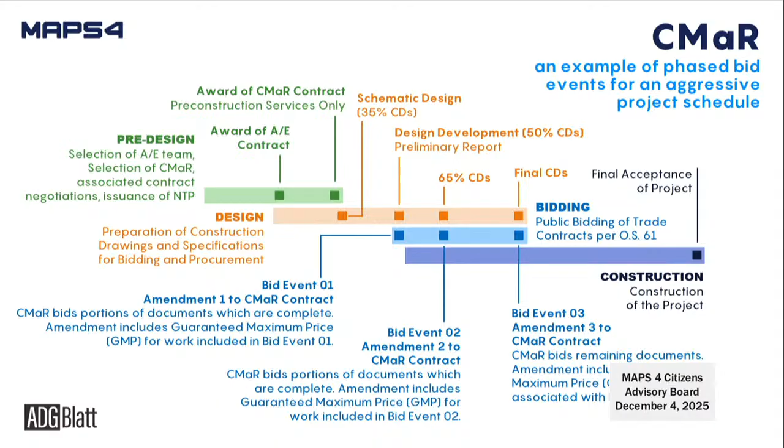As I mentioned, there's a public advertisement for construction management at risk services, just like the city of Oklahoma City would advertise for an architect or an engineer. We'll award a construction management at risk contract very early, and you'll see that on some of the projects that we're doing using this method. Then similar to hard bid, the board, city council will review and approve all design deliverables. The final plans still have to be approved by city council before we go to bid.

That's required by city charter, so that will still be a necessary component of the process. Then, as I mentioned, after the public bid events occur, the construction management contract amendments will come forward. Depending on the project, you might see 4 or 5 or 6 amendments that come forward depending on the scale. Those, again, are just additional pieces where we're basically buying out the construction manager and adding to their contract in piecewise fashion.

So that's it. I think we're kind of getting to the end of this thing. I don't know if I held myself to the time I intended, but I think I'm done. So if you guys have any questions, I'd love to answer them. Any questions for Jason? None? Okay. Thank you, that was very helpful. Oh, sorry, Jessica, yes, please.